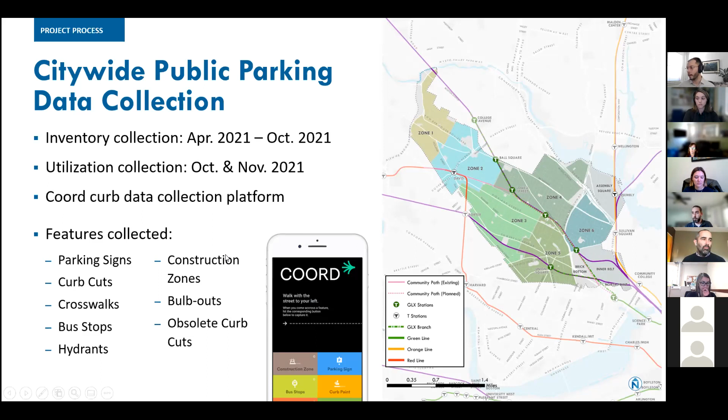We're also going to be collecting parking utilization information. That means we go out to certain areas of the city and actually count how many cars are present on the street to understand how full those streets are. That's ongoing right now, and we're hoping to wrap it up later in November, but we'll share some early findings from that work as well.

So with that, I'll go ahead and start talking about some parking and curb concepts, just to get us all comfortable with some of the language and ideas that we're presenting today.

Hey Jason. Yes. Sorry, we're getting a lot of questions posted to the comments. Do we want to pause at this section and take a look at those? Yes, I think that's a great idea. Let me take a look here. Bryn, do you mind going ahead and reading those questions out to the panel?

Sure. I will try to pick a somewhat logical order, given that we haven't yet talked about a lot of the key findings. But there's a question about looking at the Complete Streets Ordinance, as well as the neighborhood plans for Ball Square and Magoun Square that were conducted in 2017. I know we are looking at a number of other studies that weren't listed in that timeline slide, so rest assured we are looking at a lot of the insight and recommendations put in all the neighborhoods of Somerville. There's also talk about the ADA transition plan, which I don't know that we've gotten to yet, but we will definitely get to when we work towards our next steps and looking at potential trends and scenario planning and recommendations.

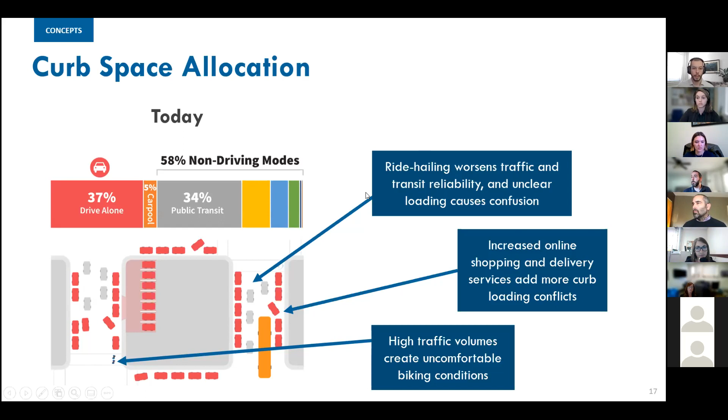If we look at our goals for the future, that's even more of a drastic observation, because looking at our Somerville Vision Plan, we're aiming for 75% of residents traveling via non-driving modes. So if we're going to accomplish that, we really need to be mindful of how we allocate the curb and ensure there's space allocated for all of those non-driving modes in order to make it to that target.

It's also an equity question. I know there were some comments about equity goals. Good curb management means we acknowledge that we don't all have the same transportation needs. If we look at this 75% number and the trends of how people are already traveling, we need to make potentially some changes to ensure the curb is managed in an equitable and inclusive way.

Finally, another concept we wanted to introduce is this idea of flexible curbs. We all understand how curbs can be used for parking, but there are quite a few other curb uses that can make even more efficient use and serve even more people in that same amount of space that a parking space would take. A typical 20-foot curb space is about the size of a typical striped parking space.

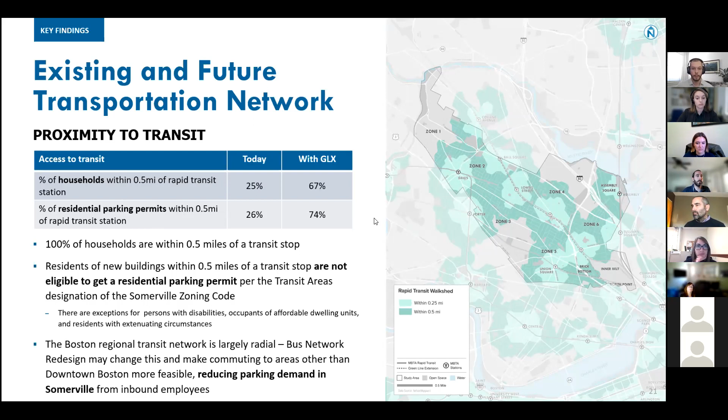Those numbers line up pretty well. When we look at the future transit areas, including Green Line extension, 74% of residential parking permits fall within that area versus 67% of households. So essentially what we're seeing is permit density is greater in those future transit areas versus the existing ones today. We'd expect the ratio of permits in the Green Line areas to fall over time once that service comes online, but that's something we need to track over time.

In terms of our bike infrastructure, we know bike infrastructure interacts with parking quite a bit. Protected bikeway designs sometimes require curb space that was previously used for parking, and those protected bikeways are going to be a big part of the city's upcoming bike network plan. So we need to be careful about how we think about that as well.

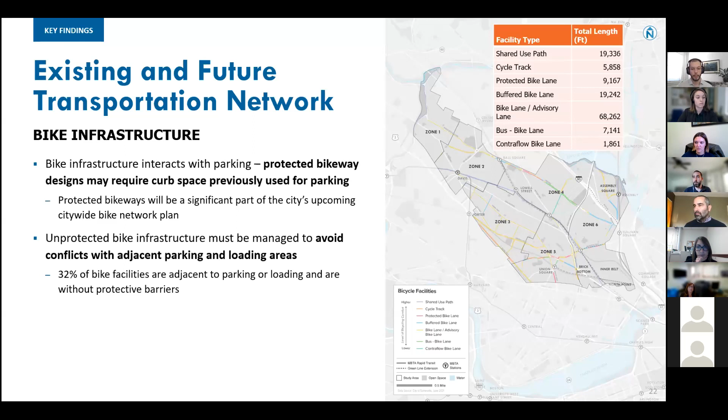We also know that unprotected bike infrastructure needs to be managed carefully to avoid conflicts and safety issues between bikes and adjacent parking and loading areas. Right now, 32% of the city's bike facilities are actually adjacent to parking or loading areas and don't have any protective barriers. Over time, it's a reasonable goal to want to see that number decrease and improve safety for cyclists throughout the city.

And going back to one of the comments that came up, 57% of workers coming into Somerville are driving alone. So we do need to be really mindful of all the workers coming into Somerville who are more reliant on driving and create a daytime parking need. Part of this plan will certainly be finding ways to accommodate that parking demand for workers, not just the residents who already live here.

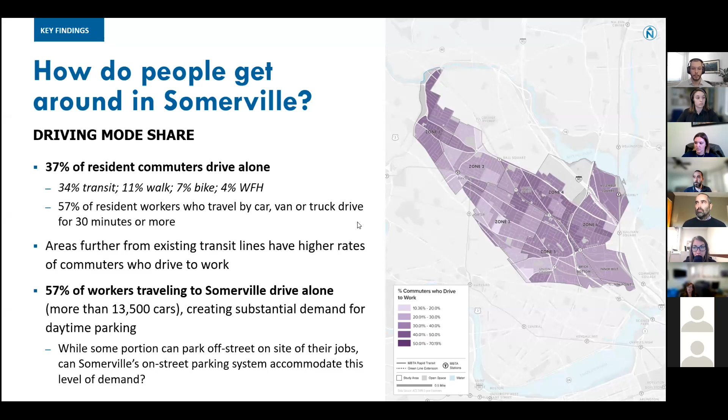Finally, we looked at concentrations of low-income households throughout the city. Coming into this study, the expectation may have been that lower income households typically own fewer vehicles per person, so they probably don't drive as much and maybe don't need as much parking. But what we found is that's really not the case. Looking again at East Somerville, it has a fairly high percentage of low-income households, but as we've already seen, quite a few of the workers who live in East Somerville are actually driving to work.

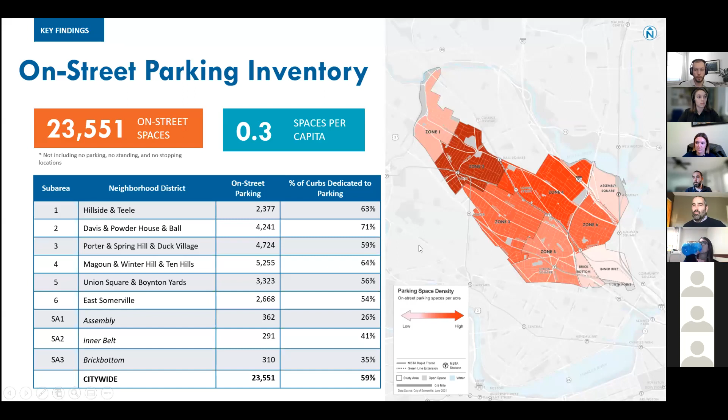So how is all of that parking space regulated? Well, there are quite a few different regulations for parking across the city, but the main one, and the one we're all probably most familiar with, is the permit parking space. We'll be diving into parking permits in a little bit as well.

Of course, we have areas that feature metered parking. We have time-limited parking - if you think about a street like Highland Avenue or Medford Street, most of those time-limited areas allow permit parking as well. And we actually do have some unrestricted parking in Somerville. I know it's hard to believe, but there are actually a few hundred parking spaces in the city that are not restricted at all.

And then, of course, we have various no-parking designations, areas used for bus stops, and a variety of loading areas for commercial and passenger loading as well. We also have accessible parking spaces, and that's something we want to talk a little bit more about.

So when we break that down and think about those 24,000 parking spaces, 17,000 are used just for permit parking, so the vast majority is used for our permits. About 3,000 spaces fall under the time-limited designation, and those can typically be used by permit holders as well. We only have about 800 metered parking spaces, just over 600 unrestricted spaces, and then a few hundred spaces each of some of these other designations.

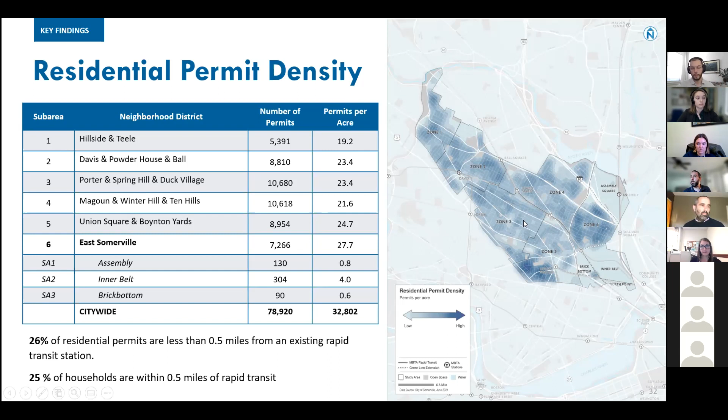If we look again at that permit density map—I'll scroll back so we can all see this—if we look at Winter Hill, for example, we know a very high rate of people are driving to work there, and yet the permit demand is relatively low. That's because a lot of people have off-street parking and housing is less dense. So we need to try to understand this somewhat complicated relationship between housing characteristics, demographics, and the permit program.

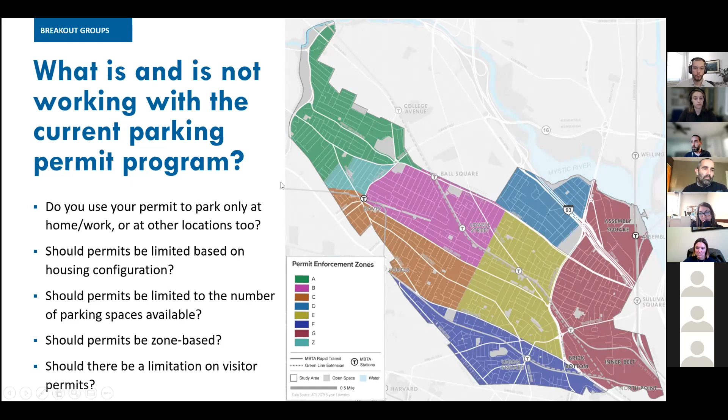Thank you all again for all the fantastic comments and questions on the permit program. We're going to move forward now. We have a few more exercises to get through. The next exercise asks all of you to please identify for us areas where you feel there are conflicts between different people trying to use the curb lane.

That could be conflicts between vehicles and bicycles, conflicts occurring at bus stops, or double parking due to loading or other issues at the curb. Really any of those type of conflict events would be great to know about, so please tell us what streets, neighborhoods, or specific areas you're experiencing them.

Seeing Elm Street and Davis Square, all of Broadway, the south side of Beacon Street, where delivery trucks can double park in the bike lane.

Another instance on Broadway, Washington Street. As a cyclist, often feel extremely unsafe around buses, particularly as they pull in and out of bus stops.

Conflicts between cyclists and loading and unloading activity, whether that's residential deliveries from Amazon, U-Hauls, or other delivery vehicles.

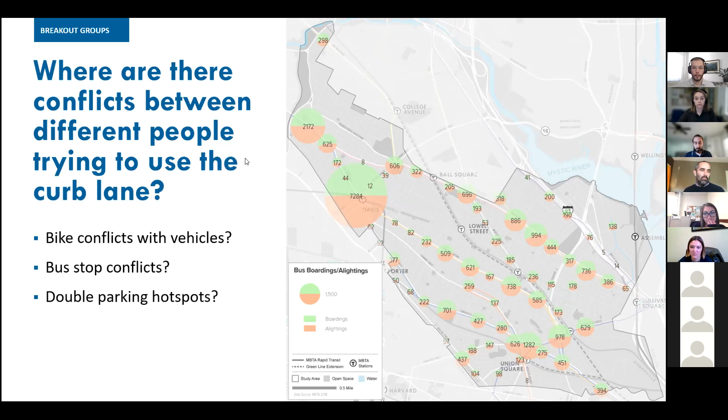Got a couple comments about bike lanes being a priority, prioritizing cyclists and pedestrian traffic, adding more greenery to the city, and additional accessible parking.